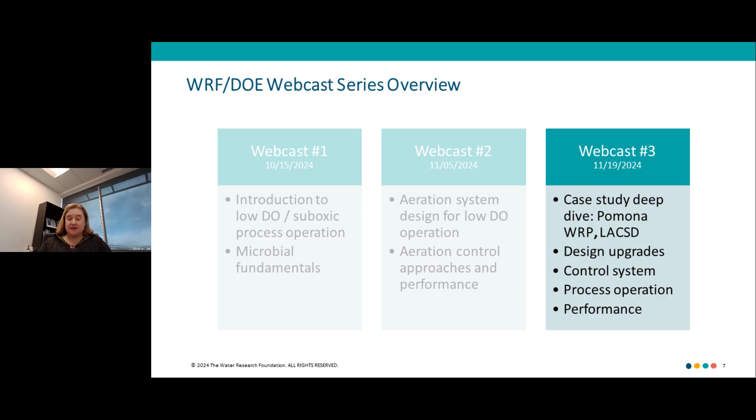As Jeff mentioned, this is webcast 3 of a series. The first webcast covered more of the fundamentals, like microbiological fundamentals, as well as giving an introduction to low DO and Suboxic operations. Webcast number 2 was more focused on the design aspects of designing a low DO plant or Suboxic plant. As part of webcast 3, what we're going to do is actually go into the case study that was part of this Department of Energy project with the city of Pomona, with Pomona Water Reclamation Plant.

So let's transition to actually the star of the show today, which would be Pomona. So to give a broader background, Pomona is part of the Los Angeles County Sanitation Districts, LACSD as we like to call them.

LACSD is comprised of 24 independent special districts that serve approximately 5.5 million people within Los Angeles County. For perspective, they have 11 water resource reclamation facilities in that area.

As for Pomona itself, Pomona is an interesting plant. It's been around since 1927, but was taken over by LACSD in 1966. It has a design capacity of 15 MGD, but generally operates around 9. It's actually a bit of a scalping plant for the downstream AK Warren facility.

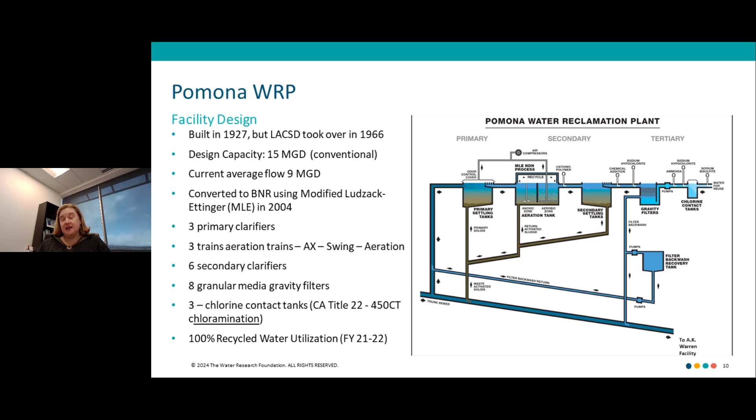That's part of what we're trying to target with this project: nitrification. That ammonia limit varies throughout the year between 3 and 3.9 milligrams per liter, depending upon the time of year that it is. The way that compliance testing works at Pomona is...

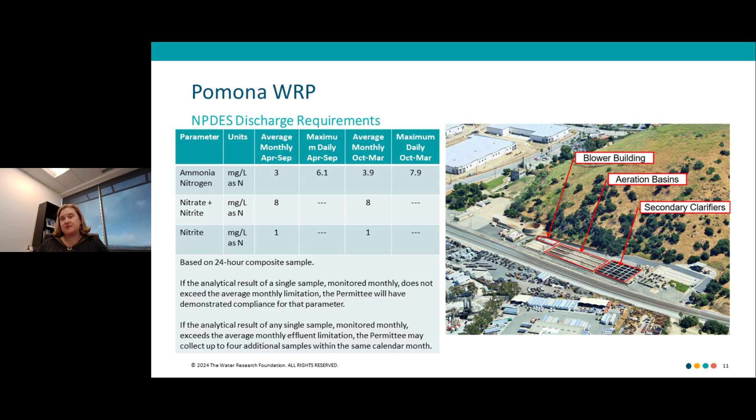Pomona basically takes a compliance sample at the beginning of the month. If they pass, then they pass compliance for the month. Otherwise, if they don't pass, then they go through a series of essentially other checks to make sure that their average is below the current ammonia limit for the month.

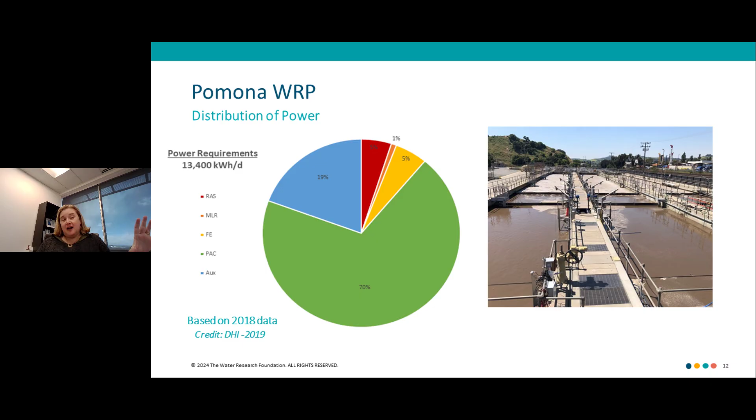There were a lot of drivers that Tom's going to be talking about in a second regarding why they wanted to be more energy efficient. And it seemed like a no-brainer to collaborate with the plant to improve this energy performance.

Now, let's shift gears here. I think part of the motivations for what we did at Pomona certainly were motivated by what we wanted to do as part of the overall DOE project. As you can see here, there were basically two fundamental thrusts to this project.

One is the scientific understanding, the fundamentals of what we do, and that was covered in webcast 1. That includes things like kinetics, microbial populations, understanding greenhouse gas emissions as well.

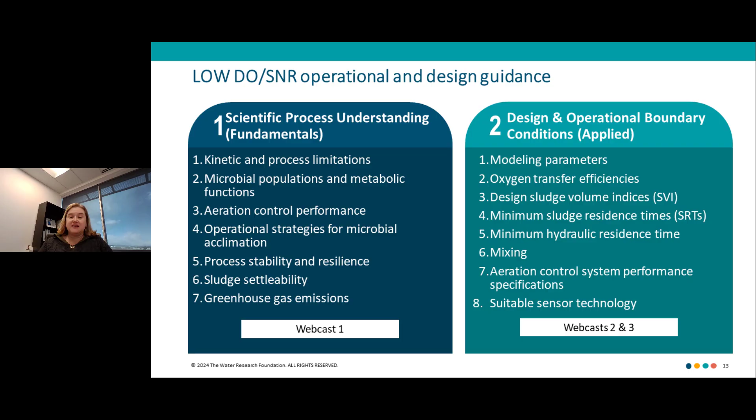Now, as part of the second part of this project, where we were more focused on design and operational considerations, which is what webcasts 2 and 3 have been about, we were looking at trying to understand how we would ultimately design these processes for more than just a small pilot, as the case may be. So we looked at things like modeling parameters, minimum solids retention times, mixing, aeration control schemes, et cetera, things that we'll talk about today in this presentation.

Just want to reiterate that it was kismet for us to have Pomona on this project, for a variety of reasons, including some that will be discussed today.

The fact that they were looking at significant infrastructure upgrades at their facility. They needed to reduce energy consumption at the plant. The fact that we could kind of control capacity going to the plant was also a major motivator, so we could actually divert if we needed to any sort of load or flow. The regulatory limits were typical for certain parts of the country, so that was beneficial. Another thing that was very important here was the fact that for LACSD, in order for us to really understand how to model these plants in the future, we need to understand kinetics.

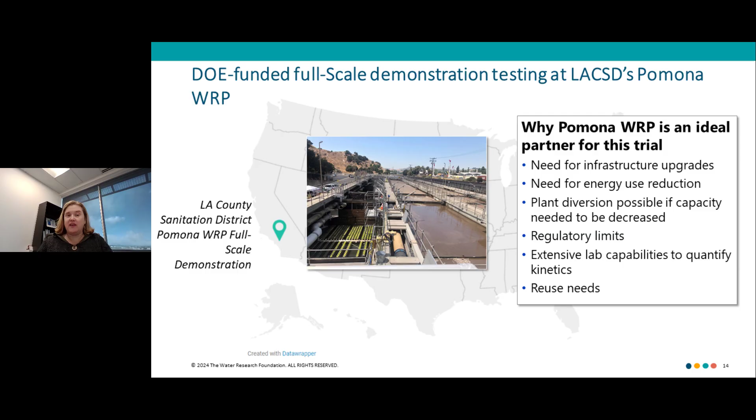And LACSD has an amazing, extensive lab capable of doing kinetic measurements, and that was really beneficial as part of the whole project. Certainly, reuse needs are part of the consideration whenever you're performing wastewater treatment, especially in the West. So with that, that's my overview of Pomona.

And now Tom's going to take over and discuss facility and process control upgrades at Pomona. Oh sorry, Tom's going to take over. I hope I said Tom, not Bill.

Thank you, Michelle. So as Michelle gave you a little background, our agency was just getting started on a project to upgrade the aeration blowers and controls at the Pomona Water Reclamation Plant. And this opportunity to participate in this full-scale demonstration site for suboxic nitrogen removal for a Department of Energy project became available. We looked at it, and it was a really good fit because it incorporated many of the elements that our research section had already looked at. So we agreed to participate, and the project was selected.

And I always say that's when reality set in, because what we realized is we had a lot of upgrades that needed to be made to prepare the plant for this demonstration project, and we didn't have much time. So in the next part, I'll discuss the required modifications we made to make this project a reality. Then in the last section, Phil Ackman will present the data and results and how we went about it. Because everyone always asks, I will name products we use, but I caution this is not an endorsement. In most cases, there are other manufacturers that make other suitable products that work fine.

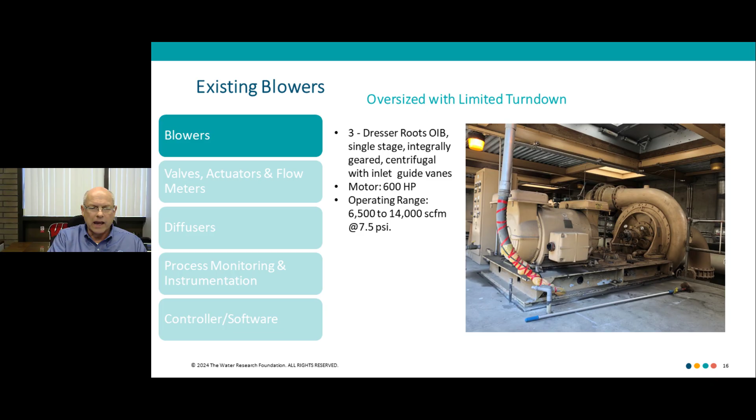And as Michelle showed in the first section, the plant really had space constraints. It's tucked behind hills on the south and a railroad on the north. So when we looked in the past at possible options to upgrade these blowers, we were somewhat limited by what we could do in this space. At some point, when the dual turbo blowers became available, we started looking at it again, and that's where this project came along.

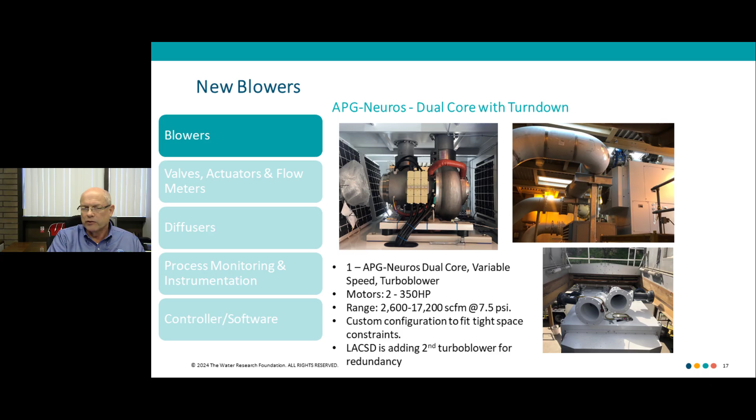Okay, so the first thing we knew is we had to replace the blowers. So what we did is we purchased a turbo blower. It's a dual core from APG Neuros. It has great turndown, 2,600 to 17,200 CFM. As you can see in the photo here, there were some really tight constraints on the space. In fact, on the top of the turbo blower we actually had to go a little bit into the hatch space with the piping, then come back down. But APG Neuros was able to work with us and come up with a custom configuration that worked well for us. And these blowers obviously had automation, so that was another benefit to the turbo blowers.

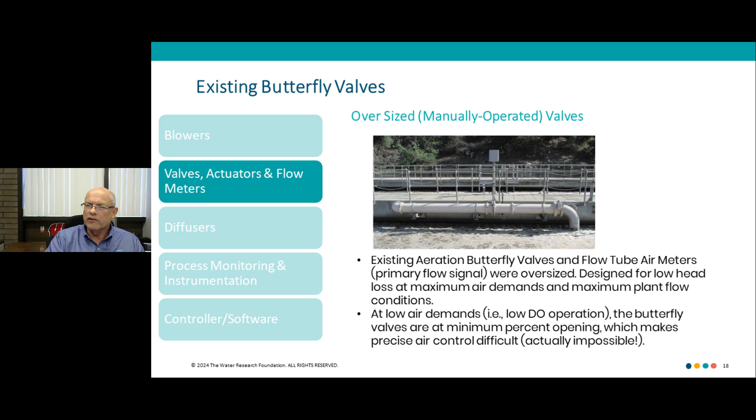Okay, we also had oversized piping and mostly valves that come into play. We were designed again at a time to maximize nitrification, so you sized it big to minimize the head losses in the pipes. The problem with that was head losses were low, but at minimum flows, this valve was going to basically be less than 20% open, or basically closed. That was going to make air control really hard, if not impossible. And at the open end, it's 80% open - the valve doesn't really have any control either. I'll show it better in the next slide.

So the valves were clearly oversized, but the question was, do we need special valves? After discussion with our project partners on the team here, we decided we could still use the standard AWWA butterfly valves. So we replaced the valves with smaller valves, and then we sized them to operate between the 20 to 80% opening for the airflows.

Tom Jenkins probably has the best explanation I've seen, and I used some of his work here. He took a standard actuator that might have like a 3% position error, and if you look at the repeatability of being off a little bit, it makes a pretty big difference on the flow, which at low DO becomes a big deal when you're trying to have precise aeration control. They also looked at the difference with a Rexa actuator, in this case, of how tight that control could be if you had a much lower error.

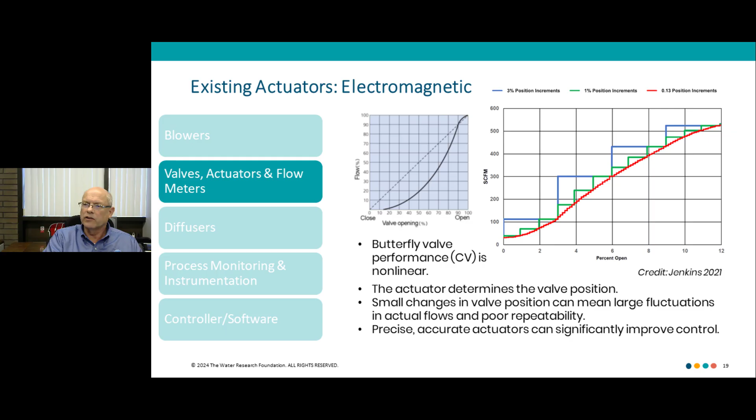So we were convinced we could try the butterfly valve with a different actuator. We stayed with the standard AWWA butterfly valve, sized it to operate between 20 to 80% opening. The actuator is very precise, accurate, repeatable positional control. We used Rotork, which was a recommendation from APG-Neuros, and we also switched from flow tubes, which may have been fine, but we wanted to make sure we had the response time needed for really precise control.

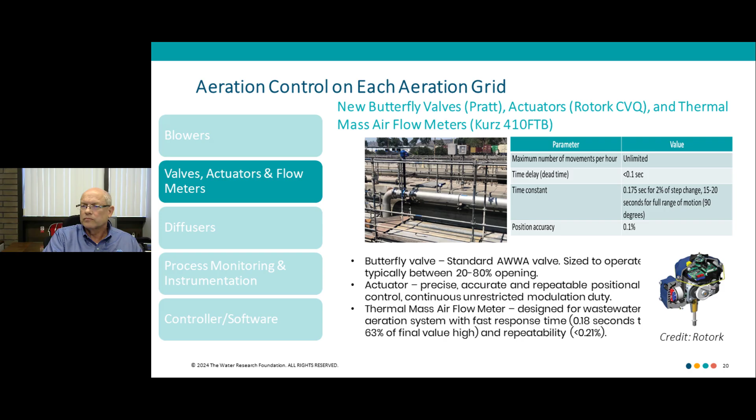We also had existing diffusers, 9-inch ceramics from Sanitaire, and we really had too many. We knew that - it was designed for a time when we were trying to maximize nitrification, so we had a lot of diffusers. It was on the upper end, and we were operating at an average loading per diffuser of about 4.4, with a minimum of about 2.2 because we never really went that low.

So we weren't originally going to switch the diffusers, we were going to keep the ceramics. But then we had some thought as we got into this - what if we do want to use the swing zones, or do intermittent operation? The disadvantage of the ceramic is if you don't have air going through it, it will fill with water, which can cause fouling, but also causes a problem when you start to put the air back in - you have to get rid of all that water. This plant does have power dips that will bring down the blower.

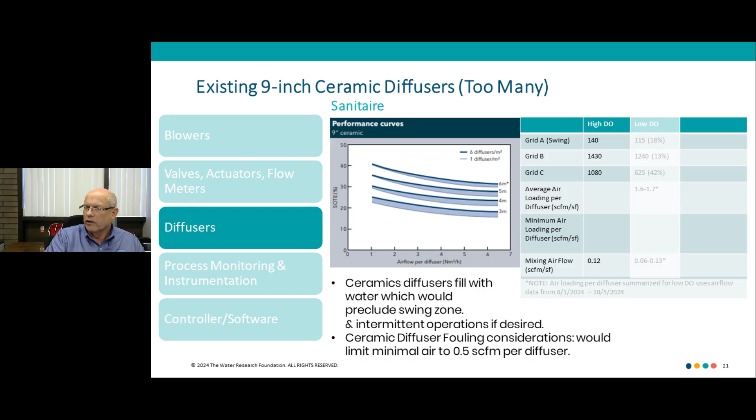So in any case, that was a consideration, and we thought maybe we'll go to membranes. The other thing I should point out is this figure on the left is the efficiency curve from Sanitaire - with a lower airflow per diffuser, you actually improve your oxygen transfer efficiency. Again, we were up at about 4.4 for the average and 2.2 for the minimum.

So we decided to go ahead with membranes, but it was really late in the game, so we stayed with Sanitaire because it was fast - it didn't require piping changes, used the same holders, our staff could actually make the swap, and we had the stock in hand. So that's why we went with that. The standard oxygen transfer efficiencies were actually very similar, so there wasn't a huge change - it's got a very similar profile to the ceramics.

We then went ahead with BioWin modeling, with assistance from Carollo Engineers, and came up with what we thought the diffuser spacing should be, or what the density should be. They came up with a reduction in the swing of 18%, grid B 13%ーgrid B being the first aerobic zone, and grid C being the second, of 42%. We actually backed off on it a little bit because it was a huge change for operators and for us to go into. In hindsight, we probably could have done that, and if we did it again, we'd actually reduce it a little bit more.

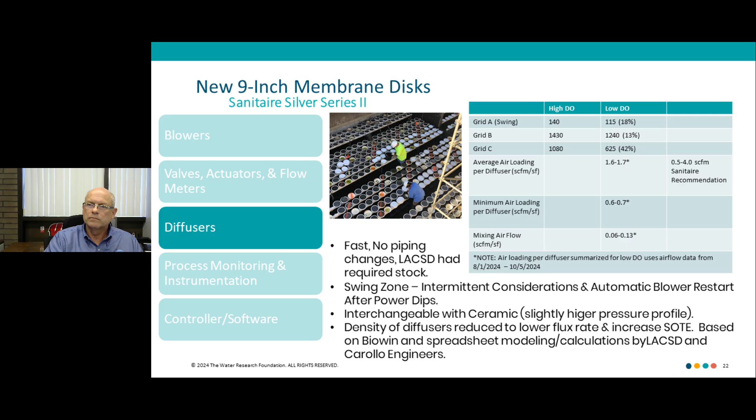So as Michelle mentioned, there are 3 aeration tanks. They're in an MLE configuration. Each tank has a small selector zone up front. The flow in this case is going from right to left, so there's a small selector zone.

Then we have an anoxic zone. The return sludge goes back into the selector zone, so it's kind of a mixing zone, and it's hard even to call it a selector zone because it's really small. Then there's the anoxic zone, where the mixed liquor recirculation, or internal recirculation, is returned, at a rate of about 2.5 times the influent.

And then we have a swing zone. Historically, we've always used the swing zone as an anoxic zone. Then we had the first aerobic zone, with a DO probe up front basically in that first zone. And then there's a second aerobic zone, with a DO probe basically at the end of that.

And our controls, again, this was the existing configuration. Controls were very basic. We basically have a header pipe that feeds tank 1, and it has a master control valve. And then there's a common header valve, a master valve if you will, that feeds tanks 2 and 3.

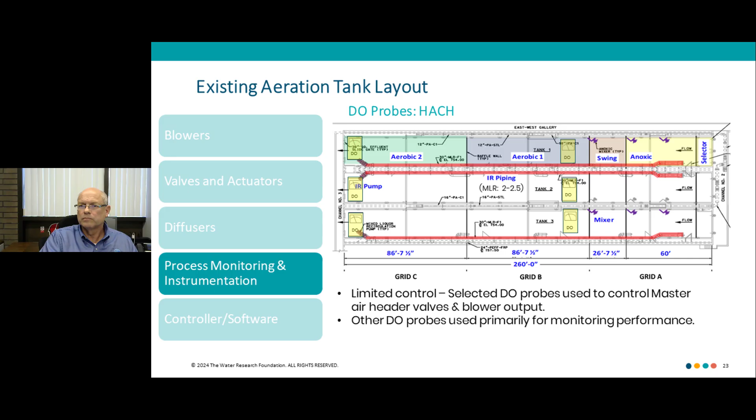In the past, because of our slow controls, operators would set a DO set point high and set it early — you always had to get ahead of it, was the thought. Because it took some time for an increase in air to translate into a higher DO and bring down that ammonia concentration, the timing was off, and that usually resulted in ammonia breakthrough at the plant.

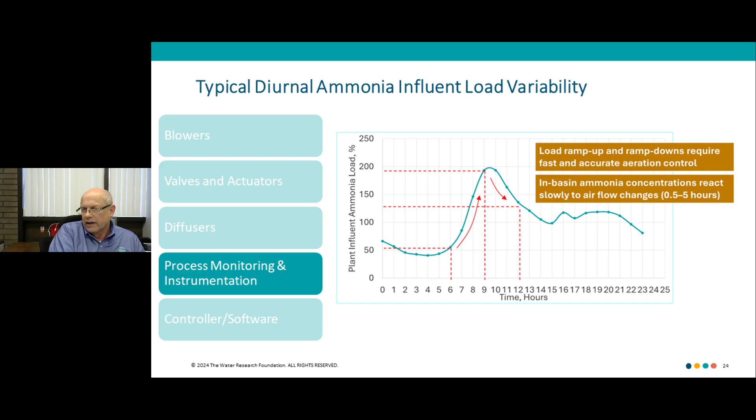This plant, as Michelle mentioned, uses chloramination for disinfection. So as you can imagine, at night we had very little ammonia to none. And for chloramination, we ended up having to add ammonia back basically at night. Because of the way the controls were set up, we were always adding some ammonia because we really didn't have very good control of the ammonia.

So that all influenced how we wanted to set up this project. Again, we were lucky — our research section had basically tested all this equipment. So we already had some experience at other plants with the equipment we were going to use, or with the type of sensors and probes.

So what we decided was — again, I'm not showing the selectors up front — we decided we were going to put a nitrate probe in the anoxic zone, a DO probe in our swing zone, a DO probe and ammonia probe in that first aerobic zone, located somewhat in the center. Then a DO and ammonia probe in the second-to-last aerobic zone, also sort of in the center. And then a nitrate and total suspended solids analyzer at the end.

We set this up because we knew that locations, even though we had tested these and had a pretty good idea where they worked best, we knew we'd probably move them around a little bit. So we made sure we had additional I/O, and extra length in the cable, so we had some slack to change the placement if needed.

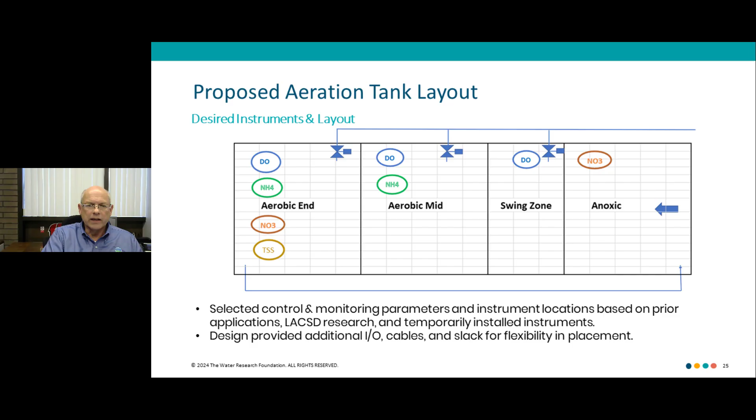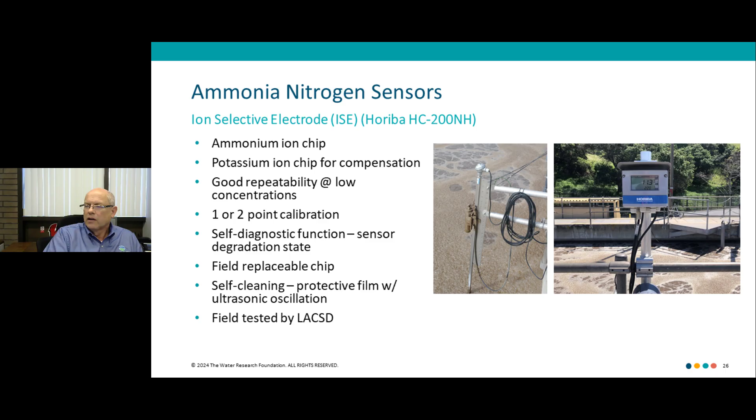Our research section tested various sensors, and in this case, different ammonia sensors. Although there were many pros and cons, the selected sensor had really good repeatability at low concentrations, was fairly easy to calibrate, and was self-cleaning with minimal maintenance. I need to point out, though, that we tested this in an aerobic zone, so it had good mixing.

Going back to before we settled on the location, we looked at other locations because we weren't sure if we wanted early detection or a feed-forward ammonia signal. So we tested instrument readings in the primary effluent channel, selector zone, and anoxic zone.

They seemed to really underreport the ammonia peaks, and we think it was probably due to some fouling. We hadn't tested these in a location with mixing, so I think we definitely found that mixing was important.

That placement did show us, though, that we had some unbalanced primary effluent conditions—the ammonia loading for the three tanks was different. That actually helped us try to balance that more, and we did get it balanced eventually, better.

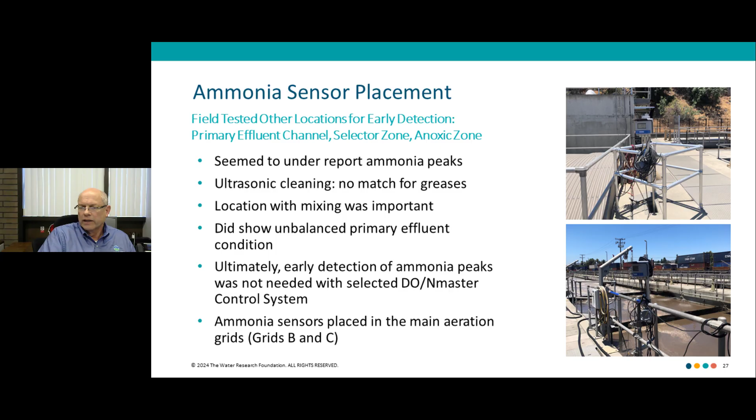But once we started implementing the DO/Nmaster control system, we found we didn't really need that early detection. So we ended up putting the ammonia sensors only in the aerobic zones, where we had good mixing and where we had originally tested them, and they have been shown to have really good repeatability at those low DO levels.

For our DO probes, we use the HACH LDO, and really the only reason is we already had standardized on that make and model at the plant, so we were familiar with it. It's what we had already.

The DO probes are factory calibrated, have no membrane, and don't use electrolyte solution. They do have a self-cleaning option, but we don't use that—we actually perform a weekly PM, where our E&I staff goes and wipes the lens once a week.

Ultimately we used ABAC—ammonia-based aeration control. With ABAC, the DO really isn't as important as the ammonia sensor. Again, we started early controlling with DO.

We had some issues as we went into it, and Phil will explain more, but as we started using it, we also had construction projects at the site where we did some hydraulic shutdowns. After those shutdowns, it seemed like a couple of the DO probes probably got a little fouled, and that made control pretty hard. Ultimately we went with ABAC, where DO probes aren't as important.

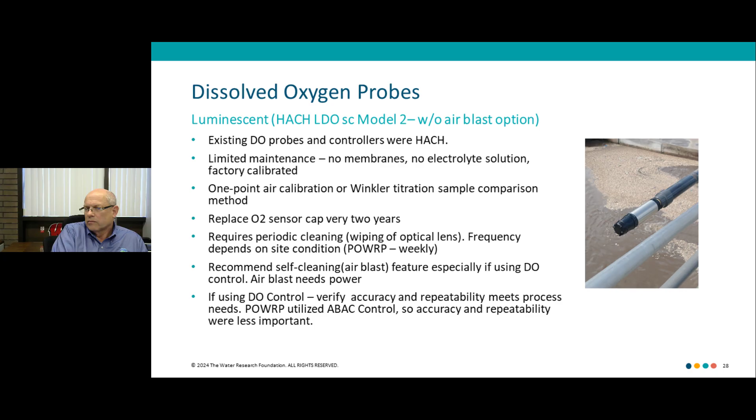If you're going to use DO control, I caution you to verify the accuracy and repeatability meets your process needs, and make sure you're doing the required PMs—or that's where I'd really recommend a self-cleaning feature if you're going to use DO control specifically, not ABAC.

For the nitrate probes, we went with the HACH Nitratax, and the biggest reason was we already had an SC1000 controller that could take 6 probes, which made the layout and installation cost less, since we could use the same controller.

We placed the nitrate probe basically in the anoxic zone, and then one at the end, as I said. We did not actually use this for control—it was good information to have, so we could see what was going on.

We also looked at modeling at one time with BioWin, and saw that we have a pretty low mixed liquor recirculation rate. We didn't see much benefit to changing those numbers—it didn't impact nitrates that much, so there wasn't much benefit to try to incorporate that into the controls.

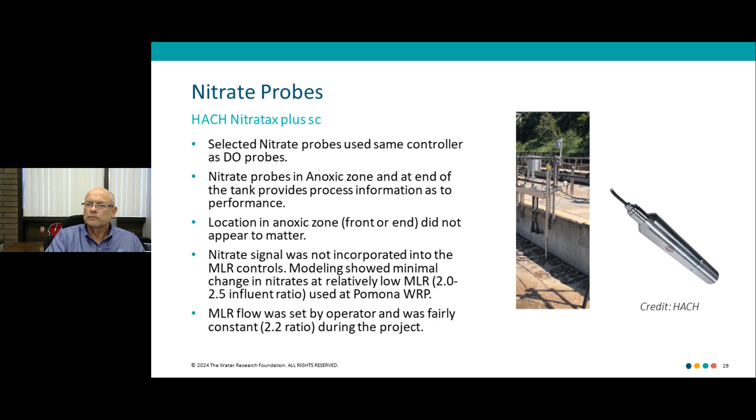We also installed some total solids and suspended solids meters, again using HACH. We put one immersion type in each aeration tank at the end, and one inline type in our RAS pipeline, where we waste from. With that, we were able to implement SRT control with Ekster and Associates' program.

What we wanted to make sure is we could maintain the same SRT as we transitioned to low DO. We maintained a total SRT of 9 days, which for us is 6.5 days of aerobic SRT. We wanted to make sure we had a stable process, knew what was going on, and wanted to take that uncertainty out of it.

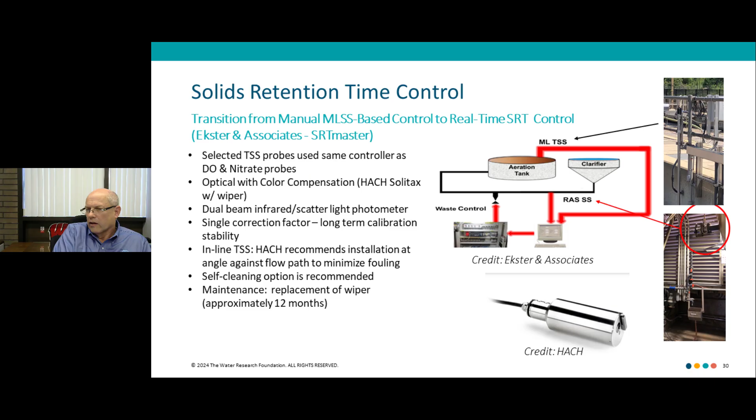I do recommend having a wiper on it—with the wiper, these are kind of hands-off, to be honest. The benefit of the SRT control showed during construction projects that required hydraulic shutdowns and some loss of plant solids—the SRT controller brought those back really quick.

The new instruments landed in an IO rack that was basically at the end of each tank.

The IO rack communicates directly with the APG Neuros master control panel. There's an industrial computer installed inside the master control panel, and basically all the instruments from the IO rack go into that industrial computer, process a lot of data, and then provide DO, airflow valve position, and blower set points to the PLC in our SCADA system.

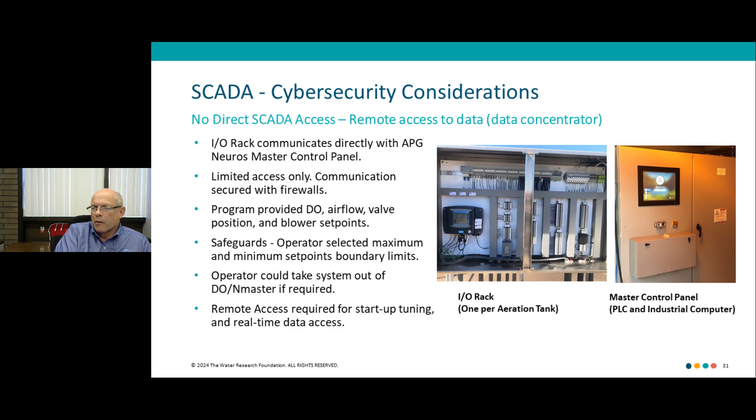We did need remote access for start-up tuning and also for real-time data access. For obvious reasons, I'm not going to go into exactly how that was done, but just caution you that you need to consider some cybersecurity. You want to safeguard it, basically.

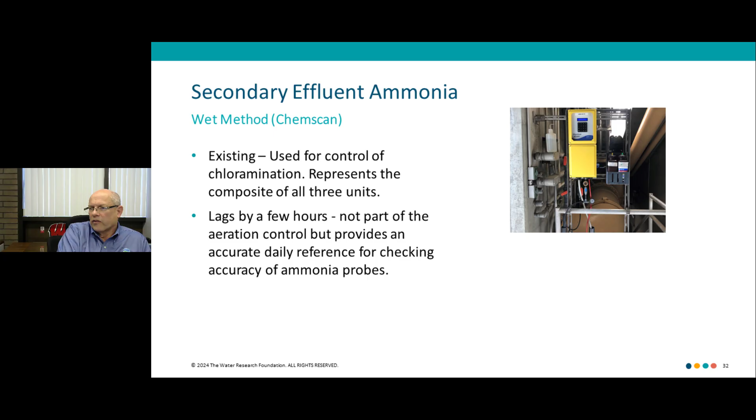This plant also has a secondary effluent ammonia analyzer. It's a wet method, ChemScan. We use it really for the chloramination. It lags by a few hours, but it was a really useful check on the ammonia probes. In general it ran a little lower than the probes. I'm not sure if that was because there was some nitrification happening in the mixed liquor channel where we aerate, or if it just ran a little higher, but it was always very consistent. So what it showed is that those analyzers were very consistent, could be relied on, and we knew where the secondary effluent was going to be, and ultimately the operators got pretty comfortable with this.

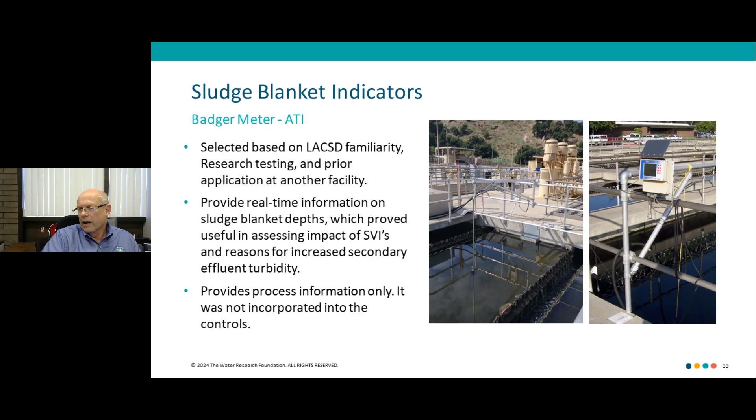We also installed sludge blanket indicators at this facility. Again, we didn't take it directly into the controls, but it gave us a real good picture of what was actually going on in the tanks. Early on, we saw our turbidities increasing late in the day as we started to transition to low DO. What became obvious was that as the sludge blanket was increasing is where our turbidity was spiking. We had plenty of filters, so that wasn't really an issue, but the staff was getting ready to leave for the day, and invariably we'd get this higher turbidity that would require filter backwashes, and they'd have to stay. With this data, we were able to point out that we should increase the return activated sludge, bring down those blankets. So again, it wasn't incorporated in the controls, but it was useful.

The total cost for the construction was $3.6 million.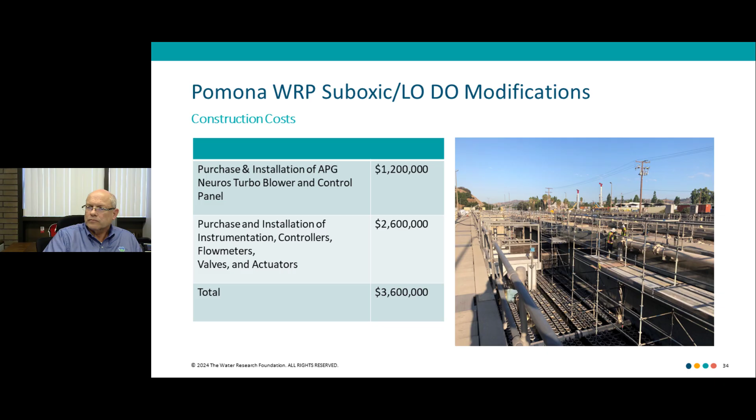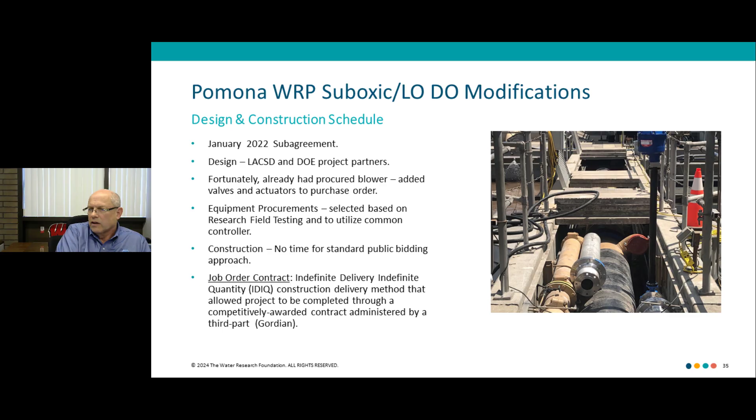As far as design and construction, as I said at the beginning, we had a pretty tight timeframe. We actually signed the sub-agreement for the DOE project in January of 2022. The design was by LACSD and the DOE project partners. Fortunately, we already had the procurement of the blower in the works. We had a lot of what we wanted from the research field testing, and in some cases because it had a common controller. For construction, though, we really didn't have time for a standard public bidding approach. So as an agency we'd started using job order contracts for smaller projects, and that became a good way to get this work done in a short period of time.

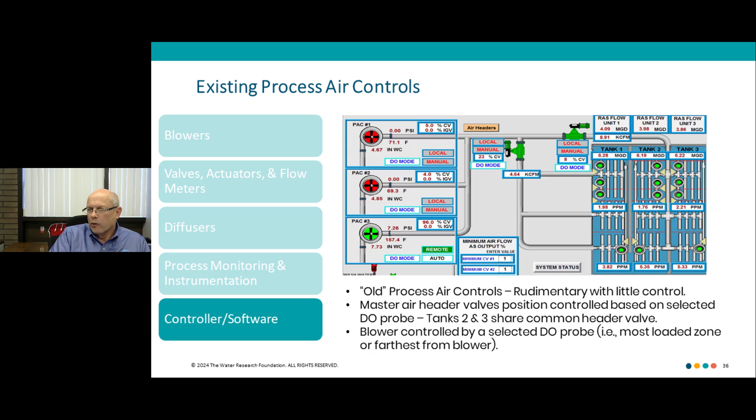The existing controls were again very, very basic. Basically just two master controls on the header and the blower, and one of the DO probes controlled the header. Another one might be used to control the blower, but that's really as simple as it was.

The new control system is basically, going from left to right, we have a DO meter in the swing zone. We have one also in grid A, grid B, the aerobic zones. We also have an ammonia meter in the aerobic zone and one in grid B. So the ammonia would go to this ABAC controller, and it would feed set points for airflow, for DO airflow valve position, and ultimately the blower flow also.

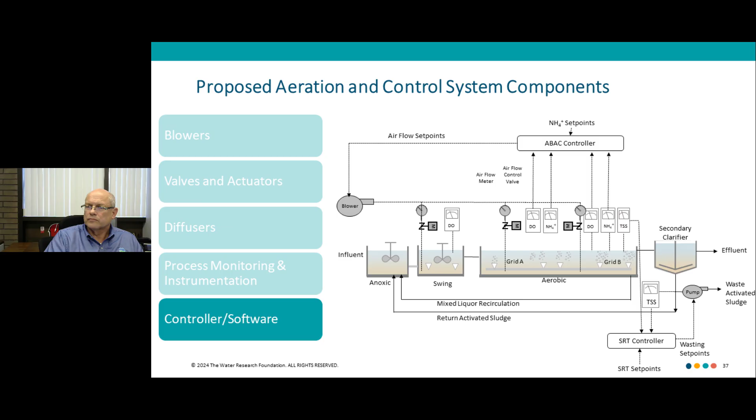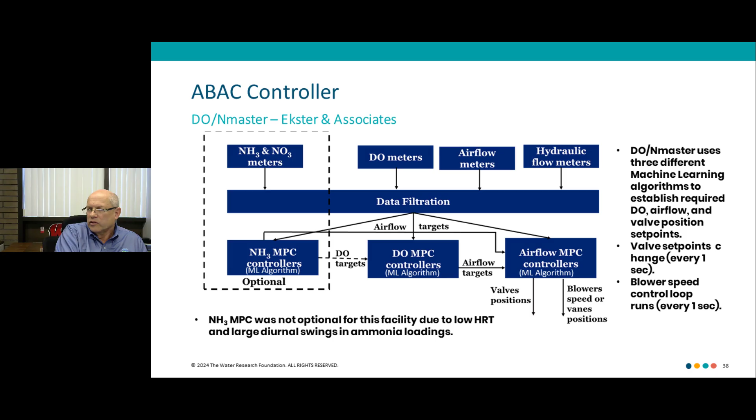I encourage you to go back to the previous workshop where this was discussed in more detail. What I do want to point out here is that the ammonia MPC basically uses a machine learning algorithm to set the DO target. Then there's a separate machine learning algorithm that sets an airflow, and another one that takes that airflow to valve position. So if you think about it, the machine learning is really learning from what we're doing. It was really important that you have tight control, so that when you move the valve, you get pretty precise results each time what you were trying to get.

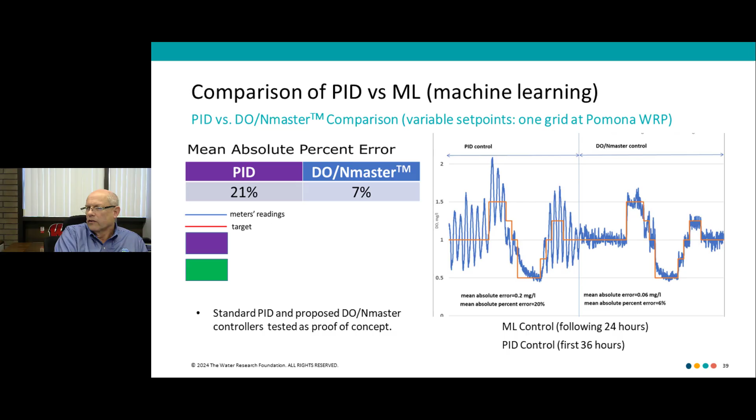Early on, we looked at comparing basically PID with what we were getting with machine learning, or the DO/Nmaster from Ekster and Associates. And as you can see, we got really tight control with the machine learning program.

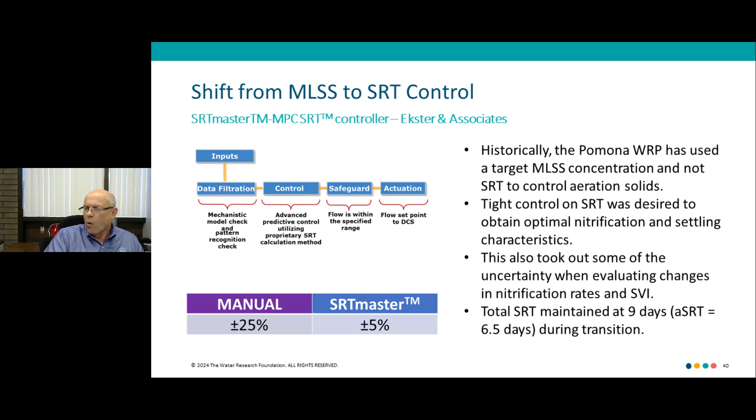This was discussed in more detail in the last workshop, so I encourage you to go back and review that if you haven't seen it yet. We did use a basic AI SRT controller by Ekster and Associates, and it's been shown to be quite a bit more accurate than trying to do manual control.

So you may ask the question, how do you exert pressure on the biomass for adaptation to a low DO operation while still meeting discharge requirements? Phil's going to go into this a lot more, but some of the things I want to point out here is, we knew the instrumentation was very reliable. We knew where we were each day and could intervene if we needed to. That is specifically true with ammonia, which was really one of our key measures. But we had all this other information about blankets and turbidity.

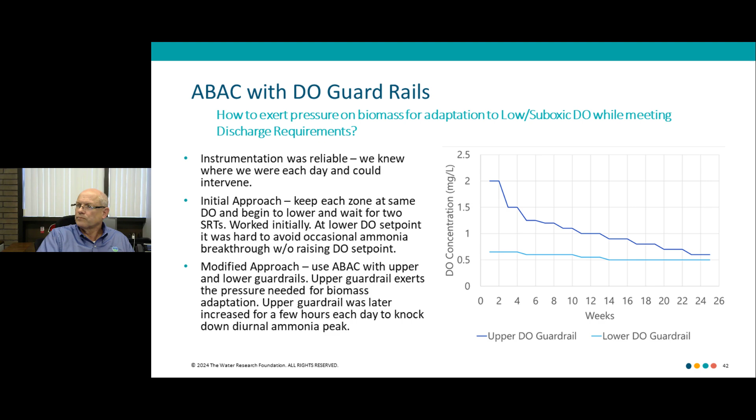So with that, I am going to turn this over to Phil, who's going to present the data. Thanks, Tom.

So as you pointed out, we're using ammonia-based aeration control. It's extremely important to have ammonia sensors that are well calibrated and that you can rely on. So I just want to spend a couple of minutes on what procedure we use to keep those ammonia instruments calibrated.

The procedure that worked really well for us was to take grab samples every 2 weeks, taking 2 samples at each sensor location - one at a higher ammonia level and one at a lower level. Here you see a comparison of the lab samples versus the sensor samples. We have a pretty good distribution, some reading high, some reading low, but there's no real overall trend, and it's plus or minus about 1 milligram per liter.

This is probably about the best you can do. The nice thing about the Horiba instrument is that you can put a linear calibration into the controller, so as the instruments drift, you don't necessarily have to recalibrate. Here we see we're looking at the current and past values to see whether or not the calibration coefficient we're using is still working out for us.

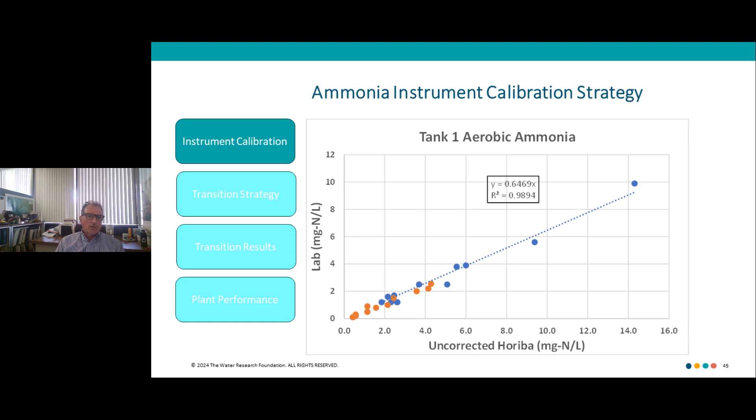What we don't want to do is overreact. I've seen some thoughts in the industry that you should set a fixed percentage of error or a fixed offset of so many milligrams per liter off, and then recalibrate the instrument. But we really wanted to use our judgment, not set some fixed boundaries.

You see here there are a couple of times when the error rate was fairly high, and we have to keep in mind there's a big difference between a 20% error rate at 1 milligram per liter and a 20% error rate at 10 milligrams per liter. So we didn't overreact to these higher percentages, and subsequent sampling did not bear out that the error was really there.

We wanted to use at least several of our sampling campaigns before we made a decision. Here we also see the value of doing 2 samples. If you look at the May sample on the far left-hand side, we have one sample that's 0.5 milligram per liter off, but another one that's 3.5 milligrams per liter off - so they both probably can't be right.

If we reacted to the 3.5 and made some sort of adjustment, we'd see that the subsequent sampling event showed that was just an outlier and we really didn't need to take any action. We see throughout July and August the instrument's reading a little bit high, and again we're usually taking data from at least 3 sampling events to inform a decision as to when to change the correction factor. In this case, we had enough data to make that change.

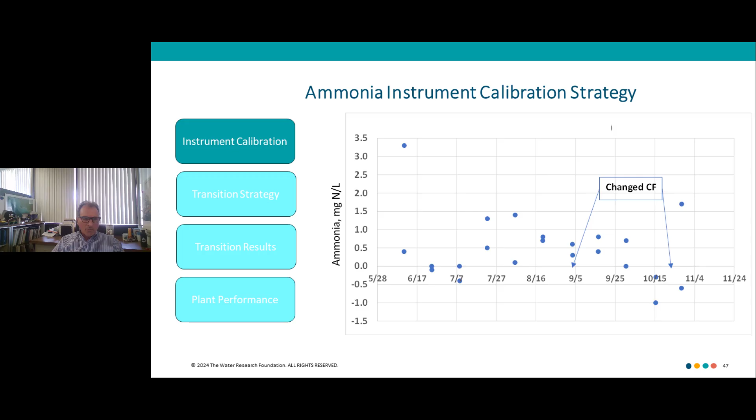In general, with ammonia-based aeration control, you could tolerate being a milligram per liter or so off - if it's in the middle, the end zone will compensate. Generally, if one sensor is reading a milligram per liter high, you'll probably have another sensor reading a milligram per liter low, and they sort of cancel each other out.

This is similar to what Tom showed - some actual lab sampling we did in support of BioWin modeling. I want to call your attention to the time period between 8 a.m. and 4 p.m., when that ammonia load really increases. At peak, it's almost double what it is before the increase.

This presents an interesting problem and maybe limits in some way what we can do as far as transitioning to low DO. We'd like to push the DOs down lower, but we have to provide enough air and DO during these peak periods to meet our regulatory requirements. As you'll see in the presentation, this became kind of a limiting factor, and we were able to use this to really chart our performance.

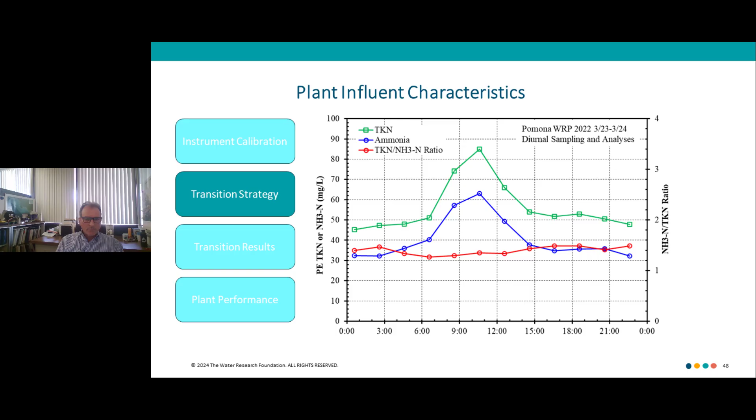As Tom pointed out, before we completed the modifications and put the individual valves in, we had a DO profile that looked somewhat like this. Our DO was always very high in the middle zone and not very well controlled, and in the end zone there were many times when the DO was very low and not very well controlled either.

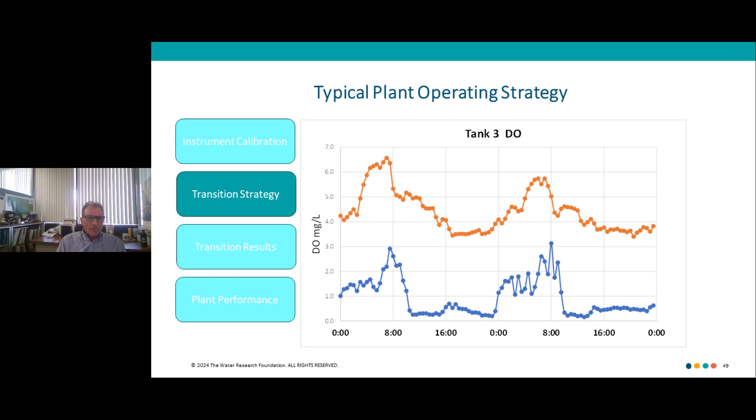It looks like there's a slide missing, but we did have an imbalance in the ammonia in the tanks, and we were able to use the ammonia sensors to identify this problem, even though we only have 3 aeration units, and the channel feeding them is not very long. We were able to use the ammonia instruments to better help the operators make valve changes.

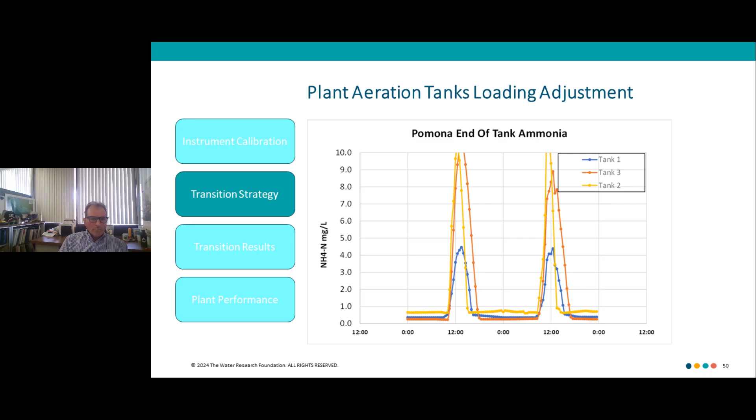This improved the distribution of the ammonia. In the beginning of the project, we started off with simple vanilla DO control. Here you see again, during this time period from 8 o'clock to 4 o'clock, that we're using a much higher DO set point in order to provide adequate nitrification during the period of time in which we have increased ammonia loads.

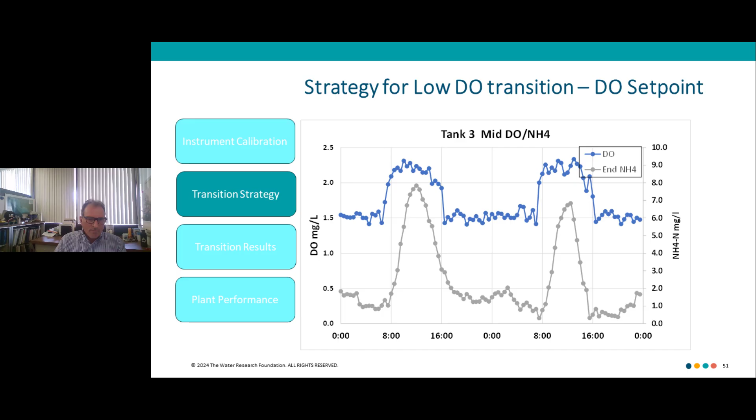As we transition to ABAC control, as Tom was talking about the guardrails, you can see here during the 4 to 8 period that we've set a consistent DO that's different in each zone. And during those peak times, the DO is varying to maintain an ammonia set point.

What we wanted to do was, we felt if we let the ABAC control completely define the DO point, it would allow the DO to go too high, and that would make the average overall daily DO not low enough and not create enough pressure to acclimate the sludge. So we wanted to hit a happy medium where we have a DO that isn't causing too much ammonia breakthrough, but we're getting enough nitrification to meet our regulatory requirements.

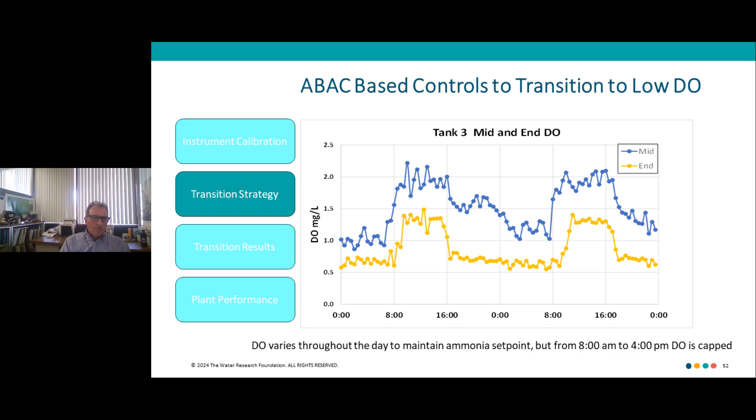So here's a little sneak preview of some of the results from later on in the project. Here we see under ABAC control, the DOs from each zone are much lower, and we're also meeting our ammonia set point of about 1, which is what we needed for chloramination, which allowed us to no longer need to add additional ammonia.

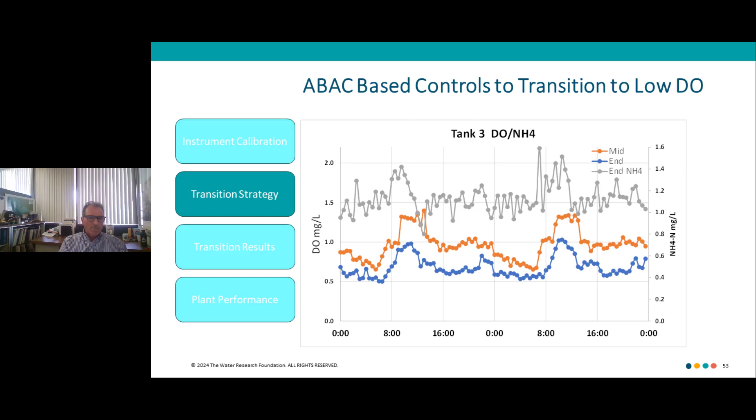So here we see similar high and low guardrails for the end zone. In the end zone, we actually started out with really low DOs, as that's the way that zone was typically operated during that period of time. So we had a situation where the mid zone is working as hard as it really can, and the end zone is just slacking off and really adding nothing to it.

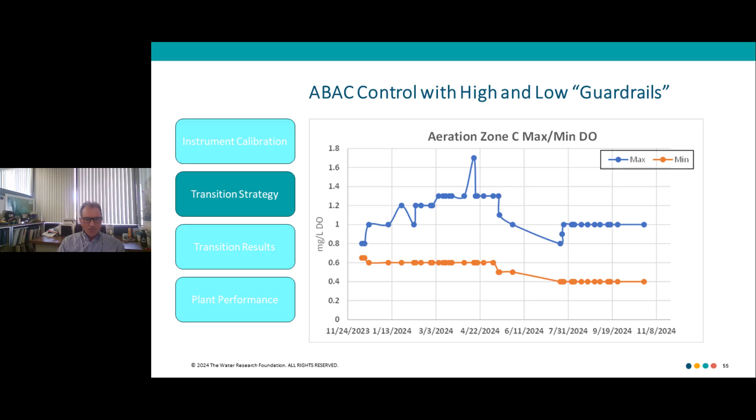So now we could take a look at some of the performance. As Tom pointed out, we were really able to use the ammonia sensors in the secondary, and at the end of each tank, to monitor performance as we changed DOs. We could very clearly see when our nitrification rates were improving, staying about the same, or deteriorating.

So here's the beginning of our transition to low DO, where we're going from a DO of 2 to 1.75 to 1.5, and we really don't see any significant difference in the peak ammonia coming out of the plant, which appears to indicate those DOs were probably excessive and weren't really adding anything to the operation. Near the end of March, you see a period of several days in a row where the peak ammonia out is decreased.

And those are the signals that we use to identify a point at which we could decrease the DO set point again. As we did at the end — at the beginning of April, we were able to go down to 1.3.

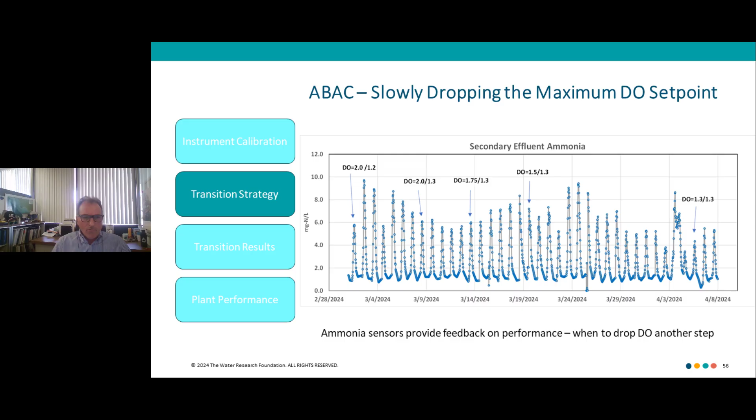Although this project took about a year for us to transition from high DO to low DO, there were many times in which the performance wasn't changing very much at all. But there were also times in which the performance would change fairly dramatically over a fairly short period of time.

Here we see over a period of about a week, we'd gone from an effluent ammonia of about 9 all the way down to something approximating 3. We're not really sure what's going on here. Maybe the sludge is acclimating over a long period of time, and it has to reach some tipping point until you see a process improvement, or perhaps the conventional wisdom of needing 2 to 3 SRTs to acclimate is not always the case.

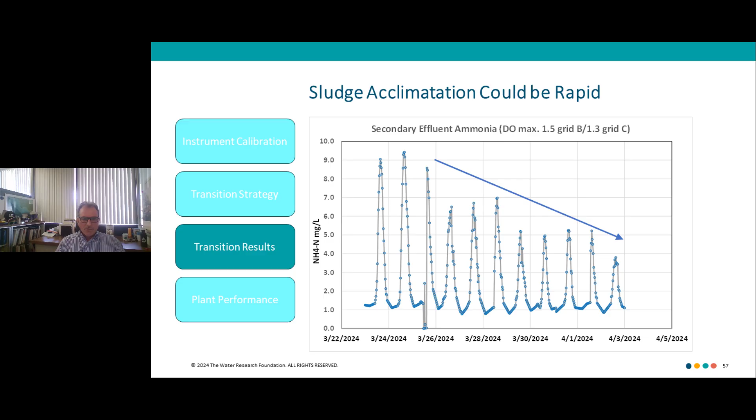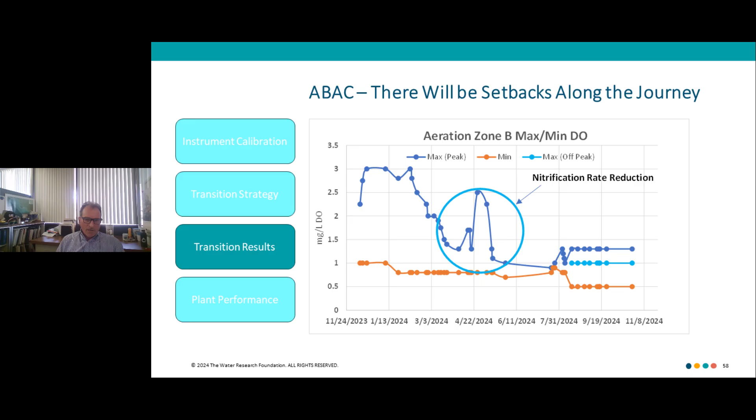As you might have noticed in the guardrail slide, there were hiccups along the way, as every project has. Not everything went entirely smoothly, and there was a time here in which we had to go back to slightly higher DOs. I'll talk a little bit about that.

On the left hand of the slide, we see we're operating at a maximum DO during that peak period of 1.3, and the two numbers there are the mid zone and the end zone. As a result of a shutdown that occurred to support the construction project, after we started the plant back up, we noticed that the nitrification levels were clearly very different than they were before the plant shut down. Our response to this was to increase the maximum DO levels immediately to see if we could get back to the nitrification levels we had.

It took us about 5 days to get back to the effluent ammonia levels that we had before the plant shut down. Then we were able to slowly, over time, reduce that maximum DO guardrail and ultimately get back to even lower than we were when we started. It took us about 3 weeks to do that.

The interesting take-home point here is that when we did have events, of which several occurred during the project, where we didn't have the nitrification rates that we previously had, we were able to increase DOs to offset that. We were also concerned that running at the higher DOs for several weeks may set the project back, that we'd lose the acclimation of the activated sludge, and that we'd basically have to start all over again.

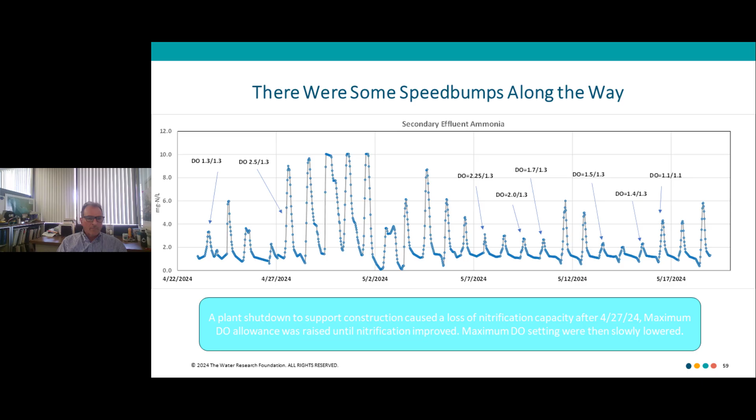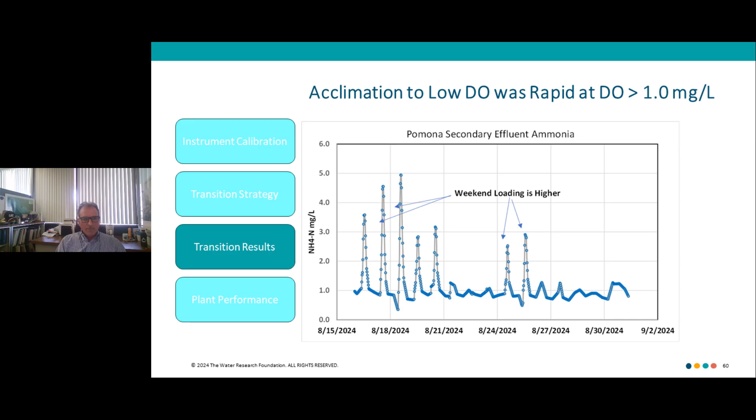It took us about 3 months to lower it to 2.0, and thereafter it took about another 3 months to lower it from an average of 2.0 to about 1.5. Then about 6 months to go from 1.5 to about 1.0. And during this last summer, we were able to push the average DO below 1.0.

You can see during the last several months of the summer that our performance was fairly consistent, and we were hoping to push the DO below even where we were at. Our lowest average DO was about 0.75, and we were hoping to push it even lower, but that didn't seem to happen. We seemed to hit a level of performance that was just a baseline, and we couldn't move any lower.

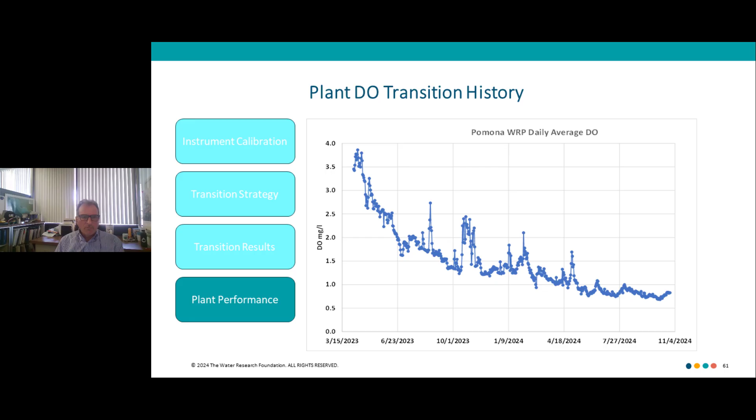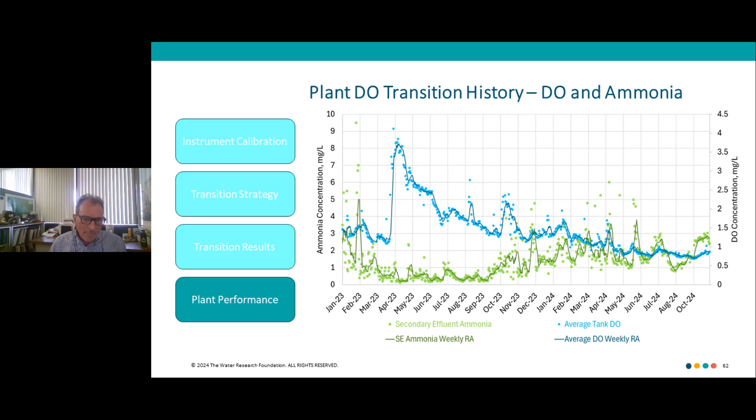As engineers, we like to twiddle knobs, and we were unhappy with the fact that although our performance in the summer was very good and very consistent, we couldn't push the DO down any lower. So since our effluent ammonia numbers were so good, we thought we could allow the ammonia set points to drift up a little. Since we're under ammonia-based aeration control, allowing the ammonia set points to come up should mean the actual average DOs should go down. So we implemented two step changes in the ammonia set points to see whether we could drive the average DO lower than what we were at. Unfortunately, this didn't make a very big change.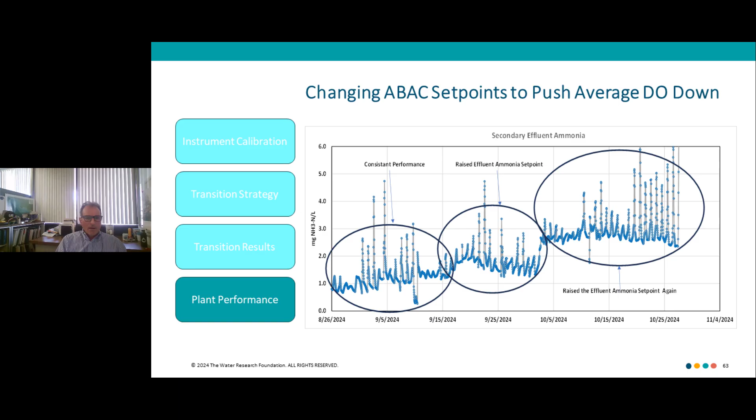We think what happened is during the fall, our influent temperatures started to decrease, and that decrease caused a change in nitrification, which offset any improvements we got from increasing the ammonia set point.

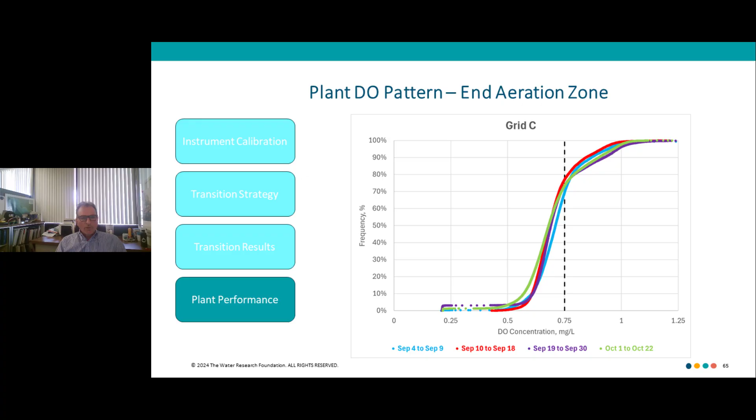Here we have a chart showing DO frequencies compared to other plants doing low DO. Some of those plants are doing a little better than we are at operating at really low DOs under 0.5 for a higher percentage of time. But we're the only MLE plant represented, so we don't think we're doing too bad.

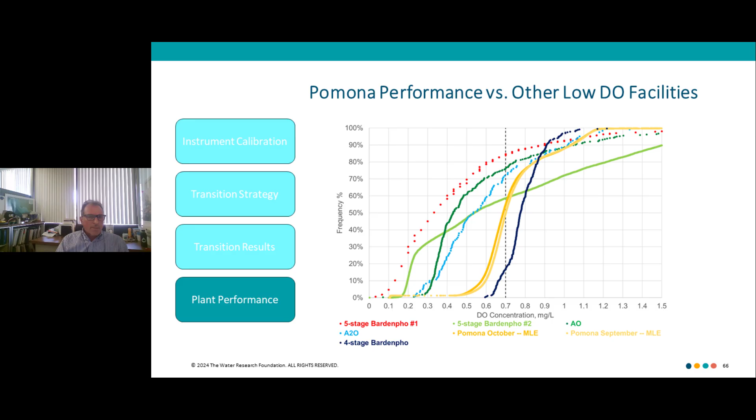As Tom mentioned, in some manner our low limitations in DO are defined by the number of diffusers, and we had to guess how many diffusers we wanted to remove. It turns out we probably could have removed some more diffusers, which would have allowed us to go to a little bit lower DOs than we're currently limited at.

One of the things we're concerned about in the project is filaments that might be growing in low DO environments. Here we see a historical plot of about six years of data for SVIs at Pomona, and you do see time periods in which the SVIs are 200 and above, with an apparent seasonal variability to this.

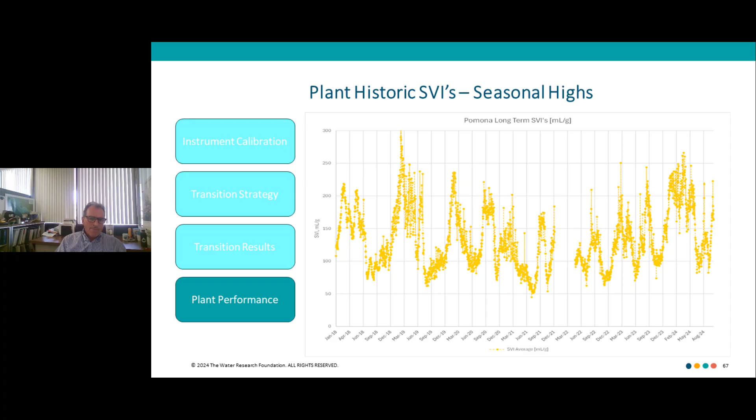Here's what the SVIs look like during the project. You can see during early 2024, as we transitioned to lower DOs, we did see an increase in SVIs from about 100 to over 200, and we had some concern that these high SVIs may be caused by the low DO environment. But as luck would have it, later in the summer those SVIs dropped off again back to 100, giving us some indication that perhaps it's not low DO after all—this was just the seasonal variation we'd seen previously.

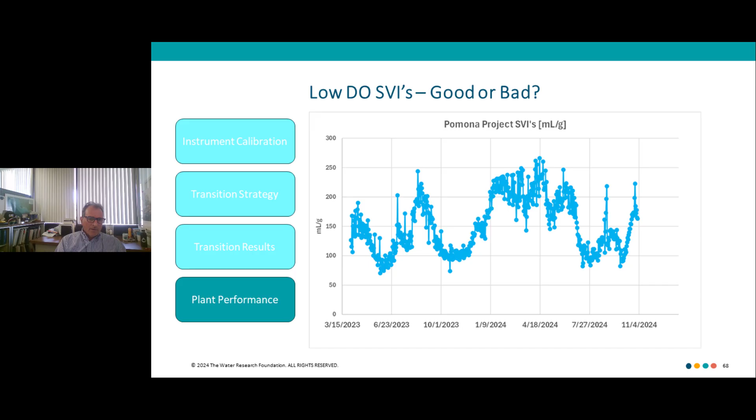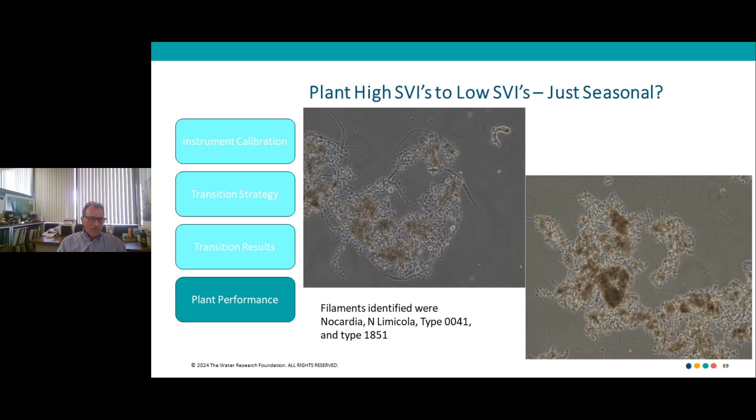During this time period of high SVIs, we did a lot of microscopic evaluation. On the left are the flocs from high SVI samples, where we see a lot of filaments outside the floc, indicative of higher SVIs, compared to the micrograph on the right, which is from lower SVIs. We tried to identify the filaments, but it appeared that over time the predominant filament changed, and no single filament stayed predominant throughout—again giving some credence to the idea that it wasn't necessarily the low DO causing the high SVIs.

So, of course, one of the important benefits of running a low DO is a reduction in energy costs. And we see here on the far left-hand side, the energy use that we had when we were using the old process air compressors was about 1,300.

There was a pretty significant change as we installed the turbo blowers. Even though at that time our DOs were fairly high, we still saw a pretty significant benefit. As we slowly reduced the DOs at the end of 2023, you saw the electrical use decrease. And as we started to transition to low DO and got into fairly low DOs of under 1 at the end of this summer, you see that we hit a low of about 400 kilowatts per MGD of flow.

Now, at this facility, we use air to mix channels. So for this particular slide, I have removed the channel aeration air, and I'm only referring to the air that's being produced by the process air compressors that goes to activated sludge aeration.

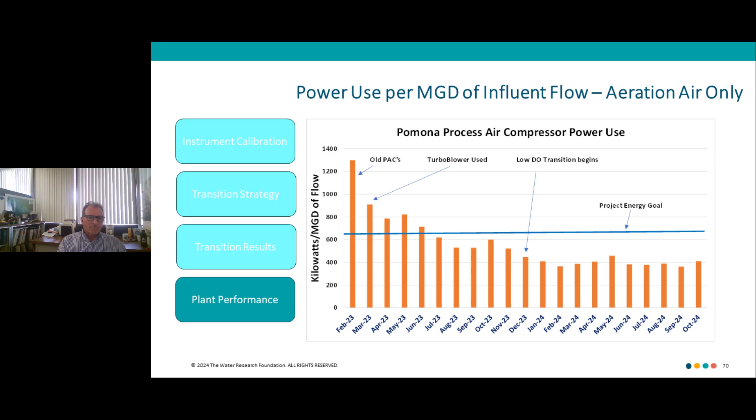So here are some of the effluent results throughout the project. In the beginning of the project, we had a TIN of about 8, and during that period of time, again, we were almost fully nitrifying. And now in 2024, where we're under ABAC control, we have about 1.5 parts of ammonia that we're allowing to go out of the system. So if you add that back into the TIN, you can see that our TIN performance really throughout the project has been pretty consistent, and there are no real significant changes at all.

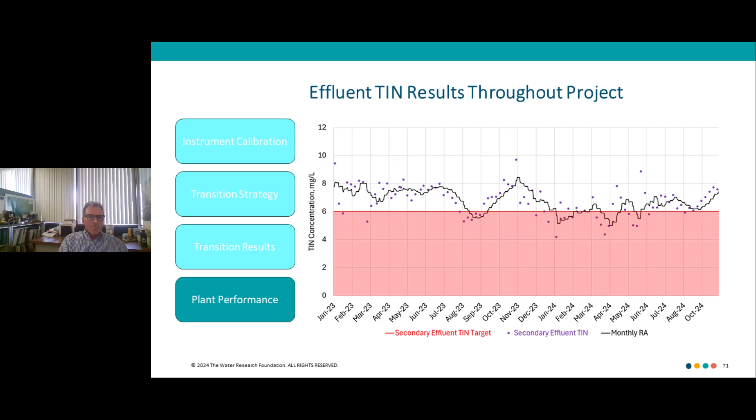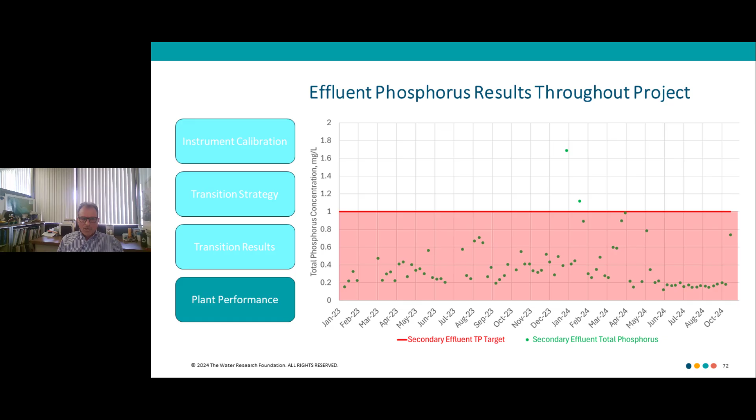So I talked a little bit about the acclimation of the activated sludge to low DOs. So what exactly might be happening here? What is going on in the activated sludge? And I think that the current theory is that there are some kinetic changes in the activated sludge.

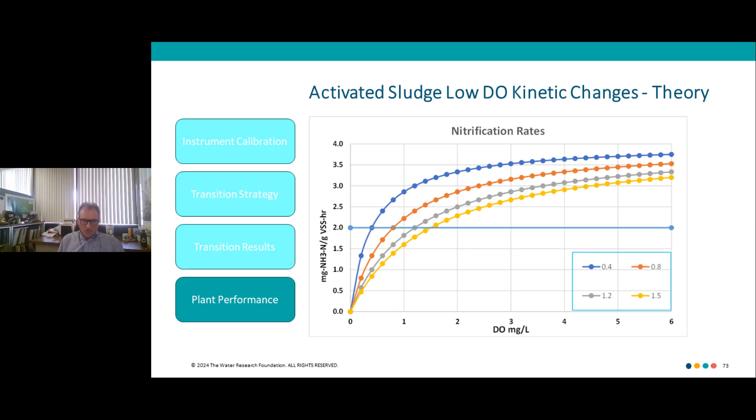I have here some Monod curves that look at the low DO, the KDO, which is the DO at which we have 50% nitrification rates. And here I have a maximum nitrification rate of 4, which is pretty similar to what Pomona is doing. And as we see the K value change, that DO that's required for 50% nitrification starts to be reduced dramatically, meaning that at lower K values, you get a lot more nitrification at a lower DO.

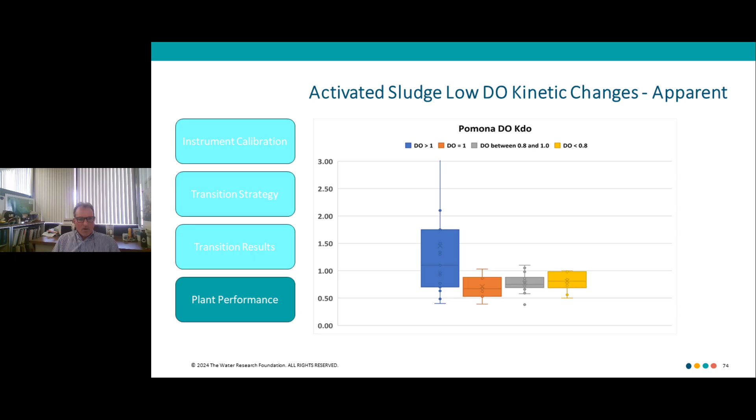HRSD has a lot of data on this, and they did a far more extensive work than we did, but our data is somewhat consistent with theirs with respect to the fact that the sludge does acclimate to low DO, and that KDO does change as that acclimation occurs.

So in conclusion, we were able to transition the plant to low DO operation. It did take a long time, about a year. We were able to maintain the SRT pretty consistently throughout the project. We obviously got pretty significant cost savings in electrical use, mostly from going to more modern blowers, but also there was some significant savings in going to lower DO operation.

And we have a lot of N2O data that we're still evaluating. We haven't had an opportunity to go through all that data yet. So we're not really sure what the impact on N2O of the lower DO operation is.